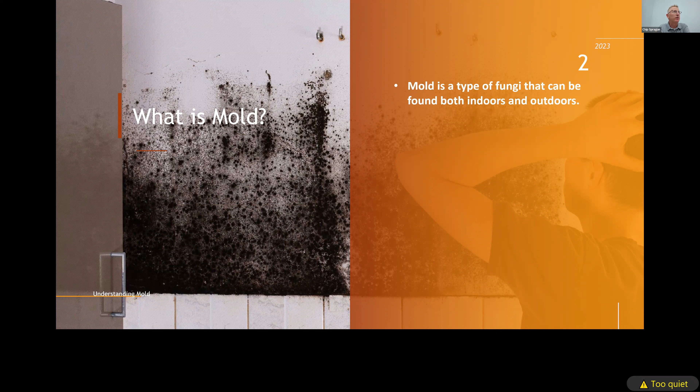So what is mold? Does anybody know what mold is? It is a living organism. You're absolutely right. It's a type of fungi that can be found both indoors and outdoors. And that's the problem, we want to keep it outdoors as much as possible, because it reproduces through spores, which can be released into the air.

Now one of the things that mold has, I got a question for everybody. Here's a tough question. What is one thing that mold does that we do, and every single living organism on this planet does, that we all have in common? There's one thing that every single living organism has in common. Sort of, kind of, you're on the right track. That's a good one, would you say? We grow. We grow, we do. One thing we all have in common. What do we all do? We do breathe. Eat, we all eat.

Good, you got everybody tiptoeing around it. Does it breathe? Yeah, breathe, we said air here, right? We breathe, we eat. Why do we breathe and why do we eat? To live and grow, to live and survive, right? Everything on this planet lives to survive. We all try to survive.

So what happens with mold, as we kill it or change anything, is that what mold needs is the same exact thing that we need. What are the three things we need to survive? Air, water, food. There you go, you got it. We need air, water, and food, right? And that's the same exact thing that mold needs. So if we take one of those away, it can't survive, just like us.

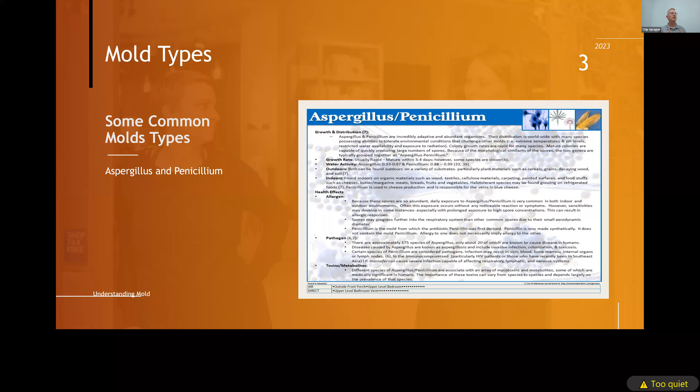So how many of you have seen that picture right there, where inspectors go in and say you have organic growth, microbial growth, fungus growth, however they want to describe it? That is most commonly Aspergillus/Penicillium. You're going to find that picture on probably every single house from the 90s. That is typical, that is common - I would not be alarmed if I saw that. It's just normal for that age of home.

You can get a mold test if your client is sensitive and really concerned about that—discuss that with them. But otherwise, just say there has been some fungal growth noted. I'm not telling you to identify exactly what it is, because I can't tell you that. All I can say is it's most commonly Aspergillus or penicillium whenever I test it, but there may be other molds in there, so we don't want to get locked into that. We can say fungal growth has been seen, we can clearly see that. Do you want to have a test for it?

The next question you want to ask the inspector, before you tell your clients this, is what are the moisture levels in there? Does anybody know what the moisture level is where all the bad stuff happens?

Seventeen, above that? Anybody else? Twenty? Who said that—Yvonne, you said twenty? Over twenty. Over twenty, you got it. When she comes over, is there a place we can give that to her? Yes, so 20% is where all the bad stuff happens.

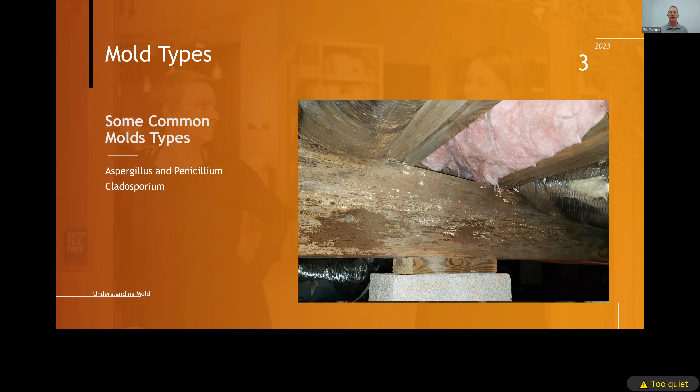Right, so that's where it gets really bad. And if I were to walk into a home and I see black on a wall - not to show my age or anything, but anybody here remember the 80s? And the cool hairstyle for guys was the mullet, right? What does the mullet mean? Business in the front, party in the back, something like that.

So when I look at a wall and I see dots or specks of mold on the wall, I think of it as a mullet. It's business in the front, and they're having a party in the back on that backside, right?

If I open up that wall, it's going to be pretty bad inside because it's come through that sheetrock and we've had water problems and water issues. So when we see that, there's no need to get a mold test. If you see Aspergillus penicillium, that's up to you. I'd probably advise your clients to get a mold test from a third party before you jump into the mold remediation company.

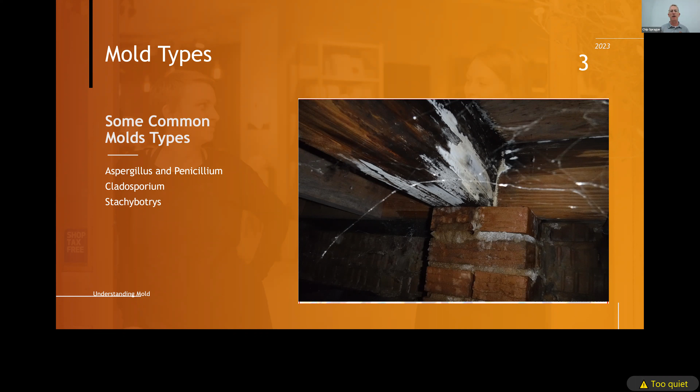The only reason I'm suggesting this is because the mold remediation company is going to come out and zoom in on that and make it look really bad. What's their job? Their job is to sell, and remediate this crawl space. To remediate that crawl space is probably going to be about $14,000 to $15,000.

Would that include encapsulation or just getting rid of it? Just to get rid of that. Usually they'll pull out the insulation, scrub down the floor joists, and put new insulation back in, and they'll charge you about $14,000 to $15,000 to do that.

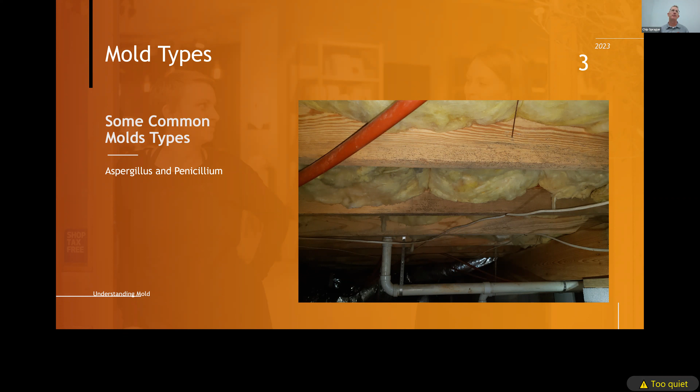So my question again would be, what are the moisture levels? Do we have an indication that it's an issue or seasonal? Just to get some background information. Then if your clients are concerned, let's have a test done and see exactly what kind of mold that is. If it's mostly Aspergillus penicillium, my recommendation would probably be to continue to monitor it unless they're sensitive to that, because that's the most common indoor mold you'll find. Now I'm not recommending you advise your clients to do anything—we want them to make the decision with educated information.

So let's talk about how mold affects us. It affects us with breathing problems, muscle pain—if you're constantly in a house with mold you can have muscle pain—depression and sadness, and if you're stuck in a home with a lot of mold, digestive disorders.

Stuffy runny nose, eye irritation, sore throat, dry cough, sneezing, skin problems—itchy skin constantly, breaking out, hives—those problems and issues, and brain fog where you just can't think or process things like you normally would. If you go on vacation and things suddenly seem clearer, that may be an indication you have mold in your house.

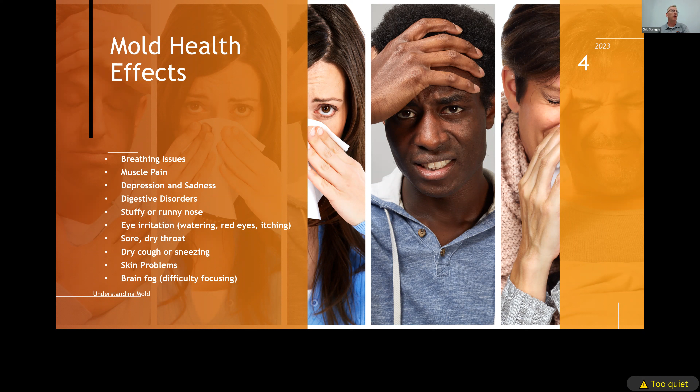It affects us all differently. We may walk into a house and I may start getting itchiness, and that may be it. You may get a runny nose and start coughing—it affects us all differently. Then again, you may walk in and it doesn't bother you at all. The only way we can test for it is through a doctor, who does a skin prick test.

I want to show you a couple of pictures here of where mold can be hiding. These are actual pictures of things I've come across, showing where mold is actually sneaking about. This is a property that I actually purchased to renovate and resell.

What you're seeing here with that pink and that crown molding is actually a fireplace. They covered up the chimney and all this nice brick—it had a real big brick chimney that went up there. Once I discovered there was a fireplace behind there with brick, I wanted to expose all that brick. The ceiling looked okay, everything looked fine, but when I started tearing that down, some of the popcorn ceiling came down, and look what I found.

That wasn't even visible, there was no way you would have known that. Let me go back to that picture. Looks a little damp, but the house is a 100-year-old house. If you walk in and look at that, you're probably going to think that's just normal for a 100-year-old house. But then you take off the popcorn ceiling, and there we go. The chimney flashing had been leaking for years around that.

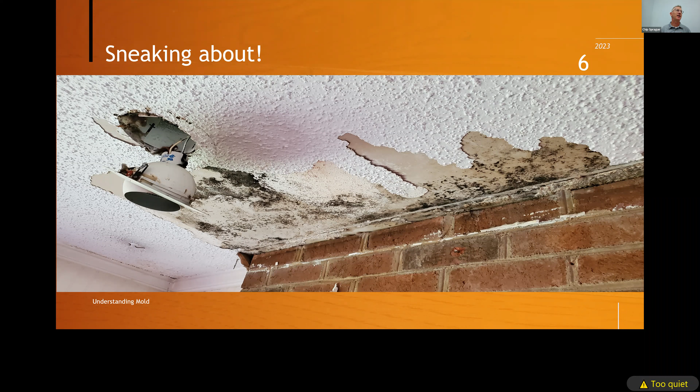Let me show you another one. This is one that I actually went in and inspected, and how I found this was through infrared. The next picture I'm going to show you, you're gonna think it was completely obvious. But before I show you the picture, this is what it looked like underneath. Can you see the little bit of bubbling right there, in the middle?

Oh, it's not working on that TV. Does it work? No, it doesn't work on those TVs. You guys can see it, right? Yeah, right in the middle.

I looked at that originally and thought it was just the tape. So I got my infrared camera out, and all of a sudden I saw some issues around there, and it was real faint. I'm like, there's something. So I went up in the attic and looked around, and the insulation's undisturbed, really nice. But there's a pipe that goes down into the ground right there, a vent pipe for plumbing, and it exhausts out. When you flush toilets or run the sinks, the water has to have air to come behind it.

So I started moving the insulation because it's directly around there, and this is what I saw. You can see it didn't come through the sheetrock, but the sheetrock is completely tore up. It went down into the wall, and this house was built in 1983, and directly above it, that pipe was never sealed. That has been leaking since 1983, for 40 years. Found that 2 months ago, and it's been draining directly down into the wall for 40 years.

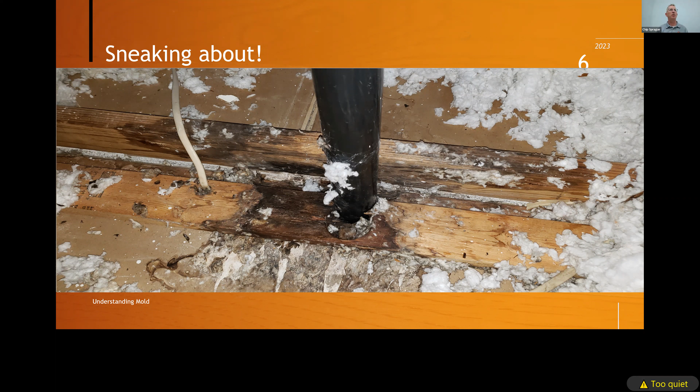So it was a seasonal thing. When it's cold out, the warmer air was coming up from inside the house, so the condensation was building up, and it was dripping down in the winter months. So you probably had 3 or 4 months where it was doing that every year for 40 years, allowing time to dry throughout that process. That's probably why it doesn't look as bad. But if it was leaking every single day, it would be pretty bad.

Anybody else going into their attic when they get home? That's what I feel like.

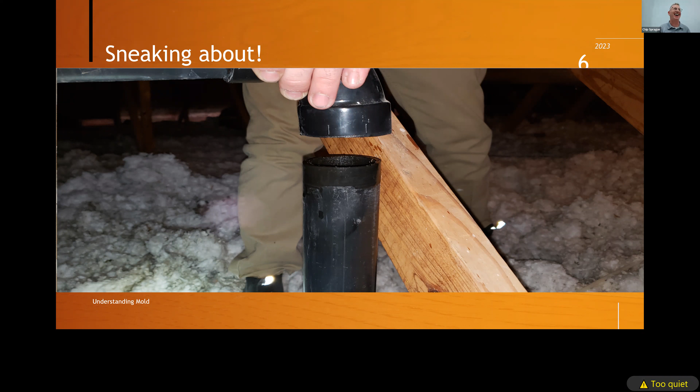So what are some of the easiest ways to improve air quality in your house? What is the easiest way? Air filters. Bingo, look at that. There you go. Air filter, look at that. I want to show you this air filter here.

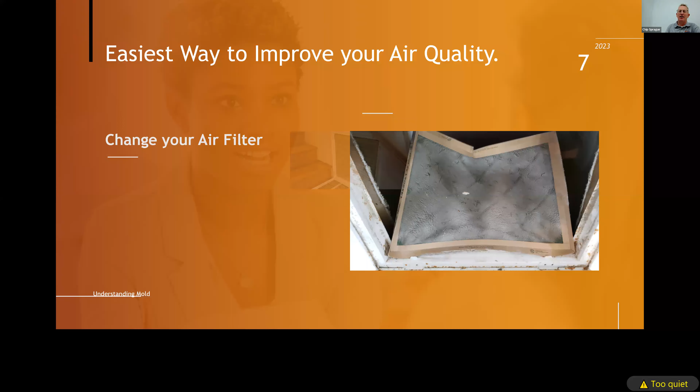This is actually an Airbnb that I rented in January. You could hear it whistling. I opened up the thing and it was completely caked. I don't even know if this picture does it justice, but it was so thick. It was pulling in and it was completely caked.

My wife had a runny nose the entire time we were there, and I'm like, what is going on? So we opened up the air filters and called the owner, and they brought all new air filters in. But just from changing that, about a day later, she was fine. We were there about a week. Look at all the junk on there. That was actually in the basement too.

If it starts whistling, that's one of the biggest problems that can cause your air conditioner to go bad. Not changing your air filter is so important. A lot of people don't think that's a big deal, and a lot of people don't change it once a year. It affects the air quality of your home because it's going to pull that in and blow it all throughout the house. Not only that, the air conditioner now has to work harder. You're pulling in air but you've blocked it, so now it has to really work hard, which is going to reduce the life expectancy of that system.

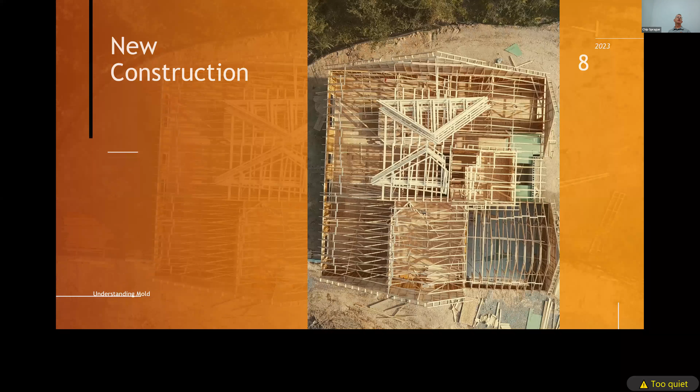So would you recommend a pre-drywall inspection? Do you guys recommend pre-drywalls for that? Is that one of the things you guys kind of look for or would ask the inspector if they see? Have you thought about that?

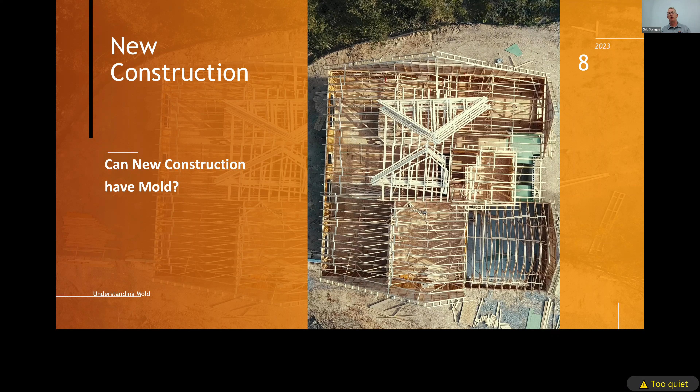Did you see any mold on this or anything like that? I had some pictures, I couldn't find them, of a new construction, but I did have this, and I'll show you this video here. This is interesting, let's see if I can get it to play here. Let's jump over.

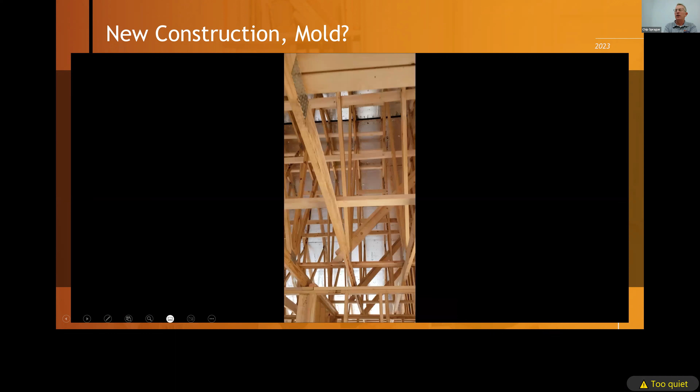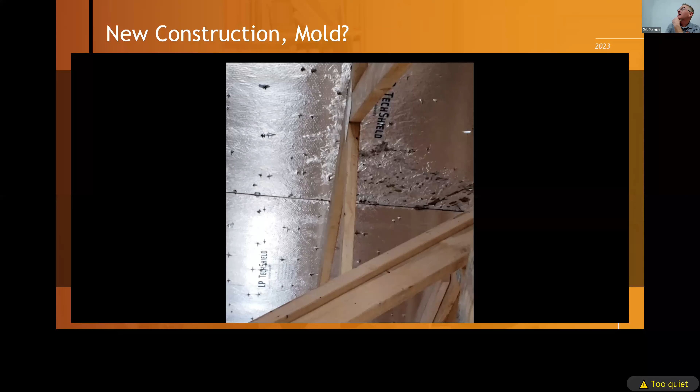Okay, so what you're seeing here, see at the top, this is the top of the roof. See that water damage? And that's got mold already starting to happen on that. And also, so I went down a little bit here.

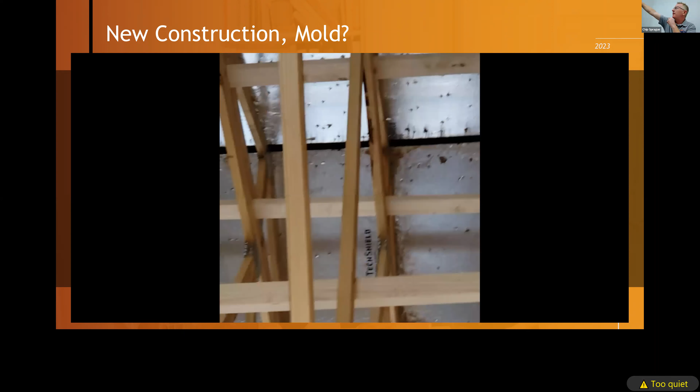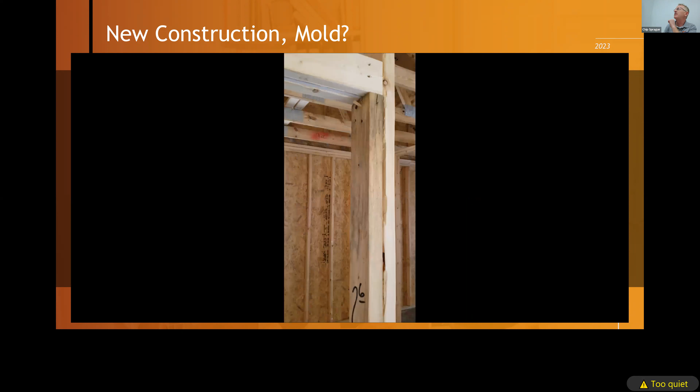You'll see some more where the radiant barrier is starting to pull apart. And we've got black, you see all that black on the 2x4? Now this one here, do you see the veins on that? Oh yes, that's wood destroying fungus. Already starting to happen. This is from one house.

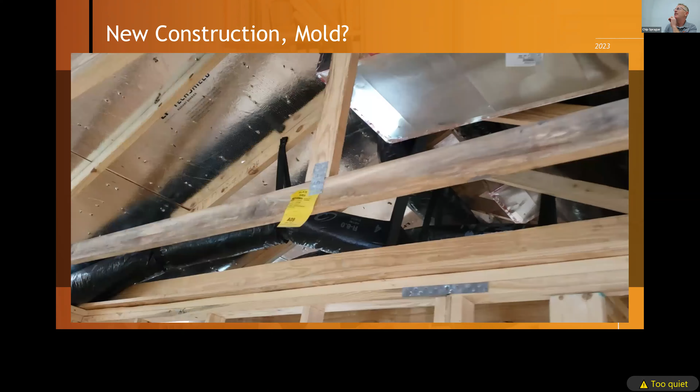Now what I want you to look at is the rafters. Ooh, see how that's starting to brown? Look at that, look at it's getting worse. This is one house. How long did it stay? This is 3 days. Wow. Is it common? This is common.

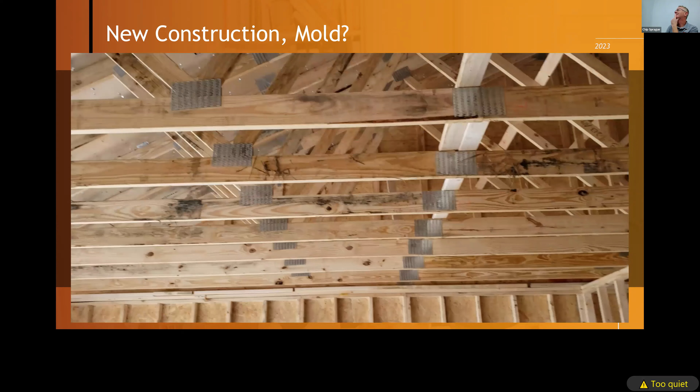Now wait for it. Ooh. What? Whoa.

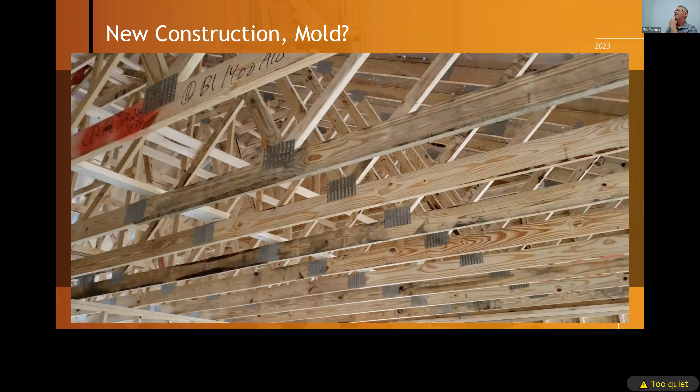So hey, that yellow thing, was that the tag from the county saying, hey, it's okay? I thought it was like, you gotta fix this. Nope. So what that was, you notice most of them were trusses. I did see, I had another one that had a whole bunch of 2x4s, but that was the trusses.

What they do is they take them and they drop them right in the mud, and they let them sit there until they get to that house. And sometimes, as you guys drive through new neighborhoods, you'll see them drop at 3 or 4 different houses and they just leave them there.

So I'm not gonna quote code or anything, but they're required to keep it 2 inches above the grade. And if it's gonna sit out more than 2 weeks, they're required to cover it. But the problem is they're just sticking it right in the mud. Yeah, and then it rains.

And then on top of that, they could leave it open and not put the roof on it. I mean, how many times have we seen it where it's just wide open and they didn't have it covered or anything like that? And with that, that was one house. And they're just gonna throw the sheetrock and insulation in there and cover all that up.

Do you think anybody moves in that house? Someone should be on it, like the superintendent or the GC on the job site. Sure, things like that. They're not, so they're not gonna remove that, and I'll tell you why. Money. Well, that's the number one reason.

But everything that I showed you was a truss configuration. So in order to remove that, they'd have to cut those out and get an engineer out there to rebuild those trusses, because they're all engineered trusses. So that's gonna be a lot of money. And there was a lot of trusses in that house that needed to be removed and replaced.

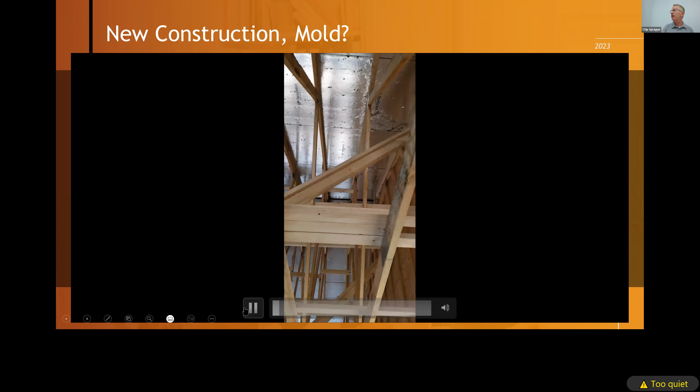But sorry, I didn't mean to go down that track. Oh, looks like I hit play again - let's stop that, sorry. All right, so let's show you how we test for this. For those of you watching, let me switch this - stop sharing my screen here.

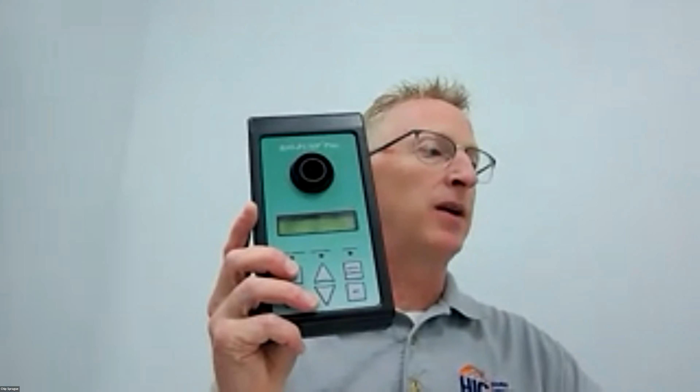Now when I do my air quality testing, I'm going to use this machine here and take my air samples. Again, we do 3 samples, so it could be 3 air samples, or 2 air samples and 1 swab, or 3 swabs. Why do we do these combinations? Because we have to have a comparative analysis for air samples — we need to see what's going on outside, what's going on inside, and compare the two.

In the fall, levels are going to be elevated — you're going to have elevated levels, and that's going to elevate the levels in the house. But we still want levels higher outside than inside. If it's higher inside than outside, that may indicate a problem, depending on what it is.

When those levels are ready, we send these off to the lab. We hook it up to this machine — you basically set it up and let it run for 10 minutes. It pulls in the air and collects it on a little tape inside. Then we seal it back up and send it to the lab. The lab pulls this apart and gets all the samples off of that aerosol, same as with the swab.

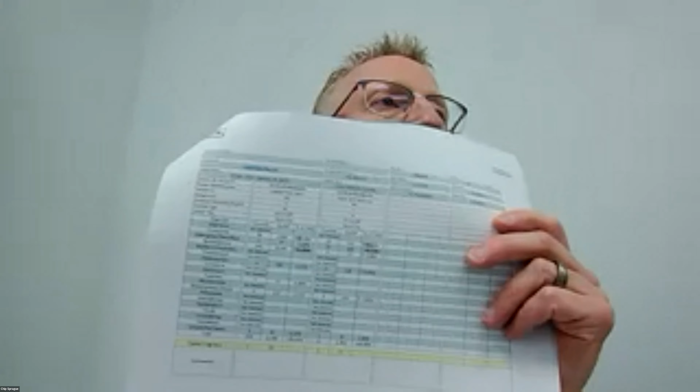The first page in the report is just information about the property. The second page, for the lab we use — and this is pretty common across the board — is going to show the air samples. The first thing we see is the air sample, and it identifies anything found, any spore counts that were found. What we're looking for is per cubic meter — CTS, M to the 3rd power, per cubic meter.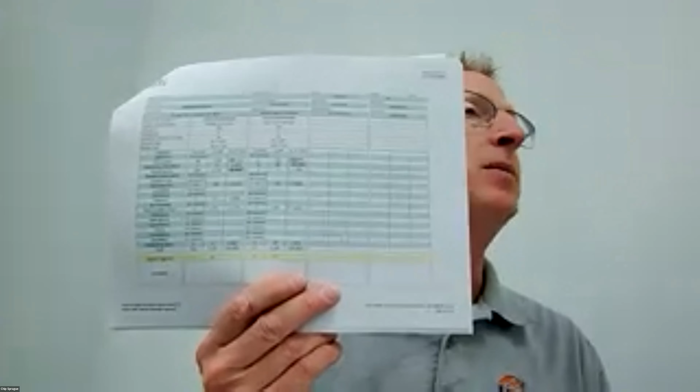That's really what I'm looking at, seeing how high those levels are, because that tells me what it's sporing at and what the air quality is within that home. So let's go to the sheet I talked about, the environmental analysis associates sheet. For example, let's use aspergillus and penicillium.

We're going to use the second column here because it's listed at the top: outdoors, front porch, and upper level bedroom. That's where we tested. It was probably because they may have a daughter with asthma and wanted to make sure that level in that bedroom was low. So we're doing a comparative analysis, that's why you see two different levels here.

So we had a count of aspergillus penicillium at 640. If I go to my environmental analysis interpretation guide, which you can pull off our website, and go down—can anybody tell me what that is? Does anybody know how to read that? If I go to typical indoor mold concentrations at the bottom, yep, you're on the right spot. Then I go to clean HVAC air supply, underneath that. Our count was at 640, so I'm going to look between 600 and 13,000.

Then I'll scroll over to aspergillus and penicillium, which is AS/PE on the environmental chart. Do you see that? So then I scroll to that and it's got a C there. Do you see that? That tells me, according to them, if your clients ask, well, is this a high level—according to them, that's considered common. Does that make sense? So if I had levels at 12,000, I'd look at it and that's still considered common.

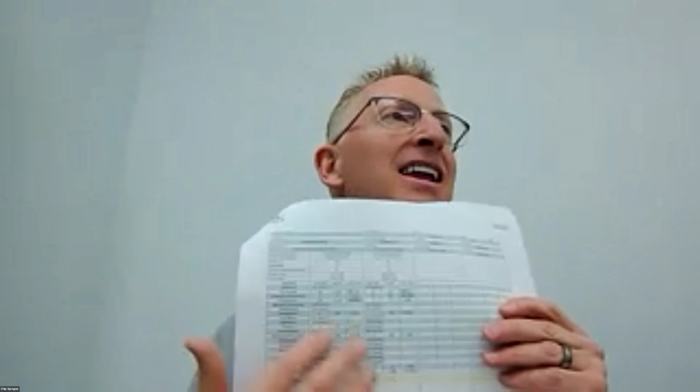Yeah, so as you can see on this mold report, it comes in a lot of pages, so people get really overwhelmed, and I'm going to explain why. When we look at this mold report, we can see some have numbers and the rest have non-detected. Any one of these with numbers, the following pages—I'm going to skip to page 6 here.

Actually, sorry, page 7, and I'll go over the pages we just skipped in a second. From 7 to 12 on this report, it identifies the molds that were found and basically gives you information about how it can affect you—any reactions, where it's found, whether it's common, what causes this mold to grow in your home, what the mold growth rate is. It gives you all that information about that mold.

So when your clients get this report and say, I don't know how to read this—that's my whole goal today, to explain this to you so you can guide them. Of course, we're here and happy to answer questions, but you can guide them through this and say, hey, this is what they found on that front page, and the back page explains what those molds are. Every page after will explain every mold that was found. Now, some reports may be 30 pages because you may have all these molds found. Then again, some reports may be 8 pages.

So it really depends, and the length of the report is going to depend on how many molds were found, because they're going to supply you with the information about the molds following that. Everyone on here will have the health effects, like I said, the growth and the distribution, and also at the bottom it'll tell you where it was found.

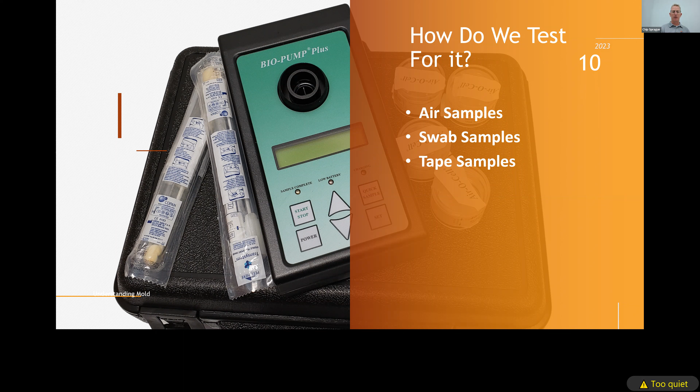We talked about the report—kind of jumped ahead there. I probably should run over this while you guys are on the screen. I'm sorry, I forgot about that, but these are basically the pages that I was just discussing. Let me bring that back up for everybody—I'll do a quick review.

So on this page here, this is everything that we were just discussing. This is where all your numbers are going to be found. And on this particular one, it's the same exact one that I handed out.

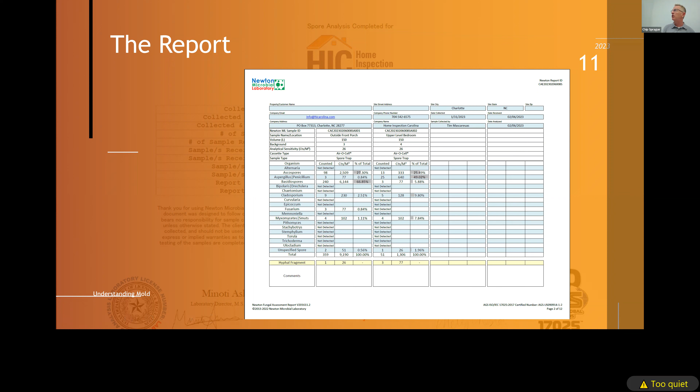So we were looking at the 640, which was here. And that's on that. If you have that environmental analysis sheet, if you went to download that, you can look at that and follow along with that. The second sheet is the analysis explanation.

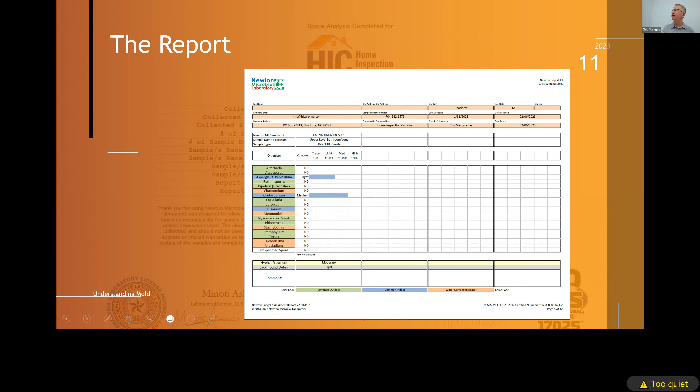I apologize, I forgot I had that on there, or forgot to jump to it. This is just the definition or explanation on the swab.

This is where it would explain all the information found within the report. It identifies the health effects, how fast it grows, and gives you information on where it comes from and common growth. This is where you can find the resources you can get.

Some of the resources we have, which I brought today, are the mold prevention tips to prevent that from happening, and the mold interpretation guide which I discussed. If you go to our website, you can pull that information up.

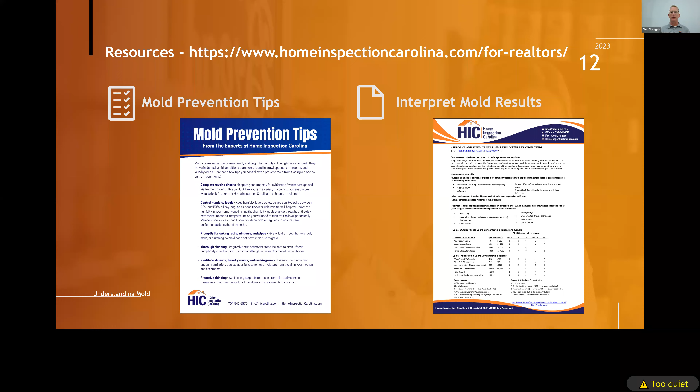And then lastly, does anybody have any questions? No questions? I have a question.

So you know how sometimes the bathrooms, even though they have exhaust fans, you'll see a little bit of black mold around the trimming on the ceiling from the high moisture levels in the bathroom. When you see that, is that something you recommend we tell them to get tested, or what's a way to get that treated?

That's a good question. On the exhaust fan, and we see that a lot on the registers too, depending on what it is, it could be exactly what we were just discussing. It could be a seal where you have moisture, air leaking into the attic. So you have moisture from condensation from the inside, just like a Coke can. We have hot air in the summer where it's 130 degrees in the attic, and cool temperature at 70 degrees inside, and you're going to have some moisture differentials there, which causes some growth around that.

The other thing could be if it's actually on the fan itself, where mold likes to grow. Mold very rarely grows on plastics, but it will grow on plastic if it has dust on it. So it grows on dust because it grows on organic material. Anything organic, it's going to grow on. So if it has dust on that fan, it's going to grow on the fan.